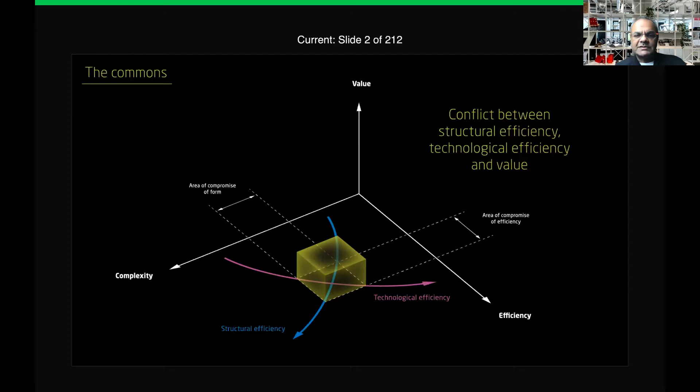And what we find is that we sit in that compromise zone trying to balance value, efficiency, and technology all the time. That's become suddenly in the last 6 months even more complicated as a common ground for someone like me. That same cube has turned into a much bigger cube as a consequence of the recent times when the world has shifted, where we can see value now more as a dance. You know, it's no longer a statue. The whole world is going to have to change very quickly.

We can see that the whole issue of complexity by the use of AI has gotten bigger, and then the planetary boundaries—this compromise zone that I call the commons, allowing engineers to operate across disciplines—has gotten really big for us. So I see it as an opportune moment.

The other thing I believe we'll get an opportunity now to revise in all these three areas is the common ground of homogenization. Over the last 25 years we've been doing these four things as engineers: being intelligent, being flying fish where we try to fly and swim at the same time architecturally and engineering-wise, sometimes modifying ourselves genetically using the tools, and often as engineers we have too many hands, none of them strong. I think all of this is going to collapse, and homogenization is going to disappear in the world of engineering in this common space, I hope.

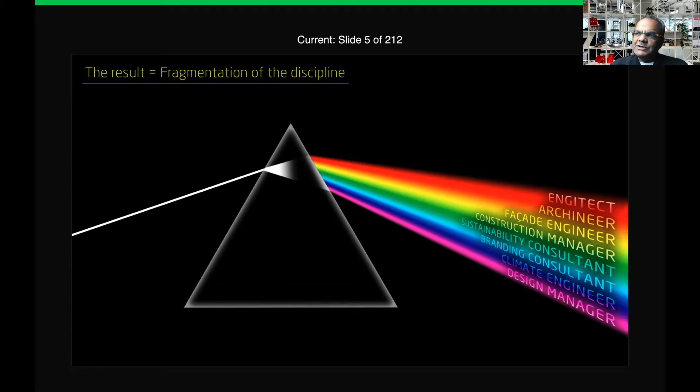One impact of that homogenization, which I've always said and repeat with this slide, is that it fragmented all of us between academy, practice, building, and our clients. So one hopes that, because of the shock of what's just happened, we will try to return to the left-hand side, all of us at the same time.

The practice still remains a combination of staunch for-profit engineering office, but also demands interdisciplinary action that we can take, in particular right now, in order to drag the profession into the discipline—which I think is not going to be easy, but it's the attempt we will make.

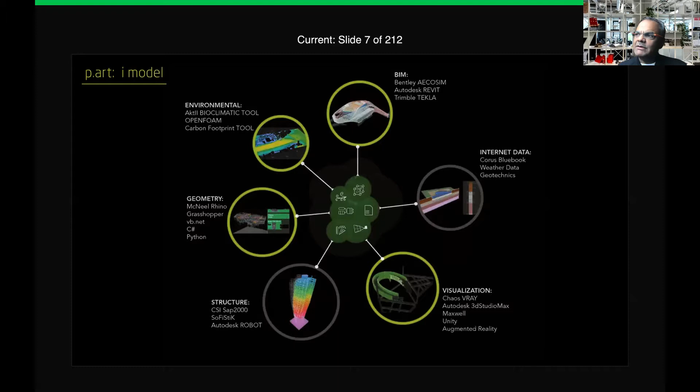That group does that by flattening the structure and the kind of things they get involved in. So our discipline as AKTII needs to do all of these things, and we try to invest in this part of the work. We're not just building and practicing—we're trying to do what I'd call research, in a very loose sense, academic research as well as practice research that then gets applied to our work.

In the meantime, the practice as a project developed its own ecology. We have to keep writing and thinking and saying things in order to move on, because if we don't do this stuff, we hang on to the profession for too long. So this is the kind of introduction.

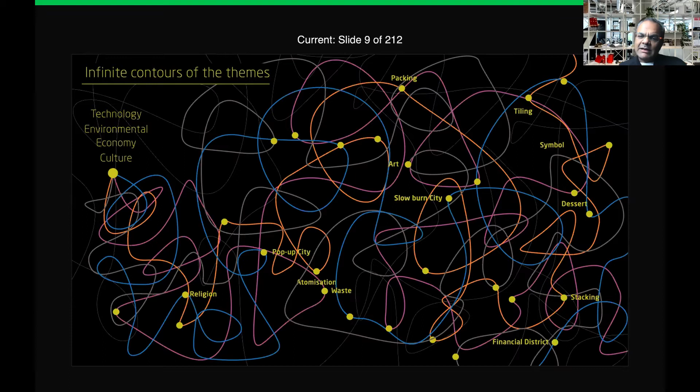For today, I broke it down into potentially three contours. I was struggling to decide what I could talk about, having a practice that's been so fortunate to have 300 or 400 people go through it. We've been fortunate that each generation has attached us to the disciplines of many contour points, and to try and talk about all of it is pretty difficult. It's refreshing to draw it and just dot it to see how many things we actually deal with. Today I thought I'd talk about three of them.

First is the technology and ecology and the social impact. The second would be something to do with intersections, direct intersections with academy. And the last would be the show and tell of a couple of projects.

If I go to the first one, I would say that we are being forced toward the social, ecological, and technological agenda of what we're doing as an engineer, or even in education. We're faced with the fascinating situation that indecent modernization in many ways is threatening ecology. And what we're finding is that sometimes there's too much eco-hipness, or sometimes too much technology.

I think we perhaps have to start to switch this a little bit, as of now, to understand the shift between nature and technique. Rather than abandoning or dominating with conservation, which is what governments are going to do next, we ought to get this balance between modernization and conservation right. Part of that absurdity of modernization that's kicking back on us is our own fault as disciplines, in that we've created absurd and interesting and difficult things just because we can.

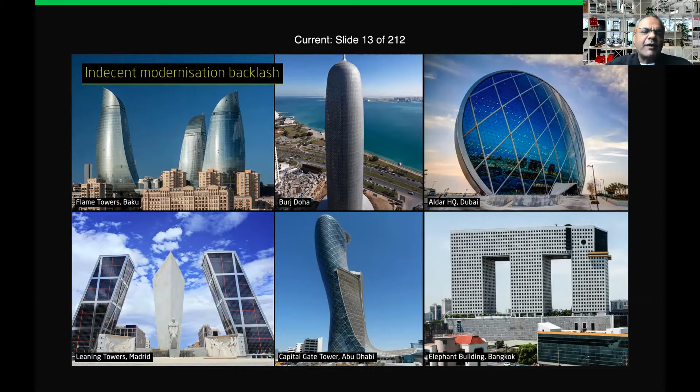So society is now beginning to kind of wind down modernity, as I would describe it. And we have to be cautious that it doesn't go too far the other way, where we stop building completely.

Part of that problem, in order to frame it for today's talk, would be to talk about cities. How do we define cities? It is so difficult, depending on who you read, who you believe, what book you understand, in terms of who is defining the city.

But probably the most difficult one of this is the one I can talk confidently about, which is the smart city, that I find abhorrent at times, because as soon as you attach the word smart to anything, it becomes dumb.

One of those things I've been finding is this separation between modernity and conservation, and how we deal with cities that have a lot of history versus new cities in the global south. It's really in conflict at some point, but the global south is going to exceed because it has so much to build.

I worry that we're being told that if we weave sensors into the urban fabric and then trawl the social network that has utterances, what we will get with these algorithms is really a city that's on autopilot. My own view is that if technology takes us that far, it is not going to be a smart city.

We have to save some of what we have done for the last 4,000 years. Of course, one of the important agendas is the sustainable goals that the UN have set up, and that is a good kind of calibrator in terms of bringing the two extremes of technology and conservation together.

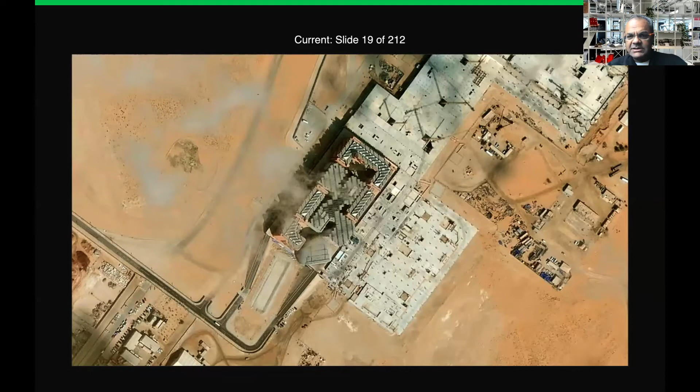That has happened through observing the existing cities of Yemen, which I showed on my first slide, learning from those, how they were built 4,000 years ago, and pushing them through with Foster and Partners, new technology and other consultants, trying to replicate some of the known things humanity has been working with for thousands of years, combined with real technology and then going on to construction.

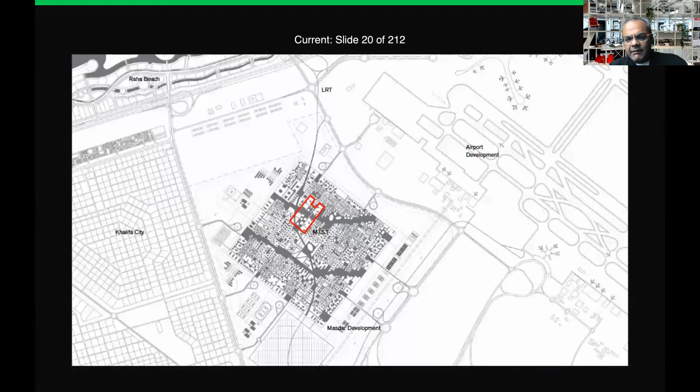We got to build one neighborhood effectively of the whole master plan, to the original idea of zero carbon. We put in the sun farm and the underground car that's electric, and built one component, which is the center of the city. It is the institute, the MIST, Science and Technology, where all the work is being done on how to develop new green technologies in the future for that region of the Middle East.

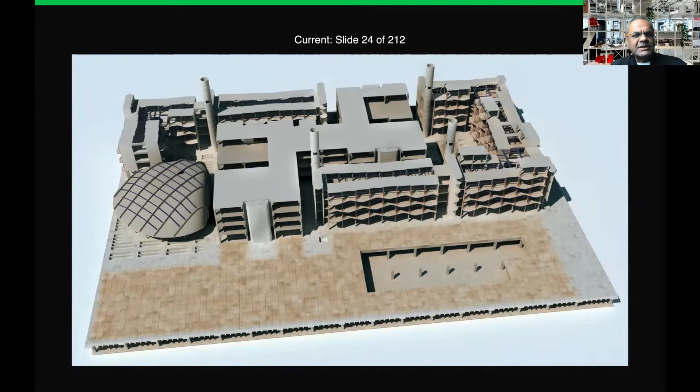And this is now fully active. I just wanted to show you that it didn't require a kind of dumbing down of the architecture by Foster and Partners. It is the best quality of construction you can get, and we use the latest tools, even the instruments or weapons of things like BIM, in order to deliver it.

But the most important message is the post-occupancy.

So after constructing it, what's important is going back to see whether the lessons from 4,000 years ago that were applied have made a difference.

This slide shows the equivalent in the same city, what is happening at our site, where we did enclosed spaces, passive ventilation, thermal mass using the materials we used, against the American dream in a way, the very big streets nearby and the very tall buildings. At the same time, on the same day, you can save 8 or 9 degrees centigrade in temperature. That amount of energy you can save without doing anything, just by putting the architecture of the past through the machine of the present, and rebuilding something modern that actually responds to the climate and the place. I wanted to drop that in as the first type of city I've been fortunate to be engaged with.

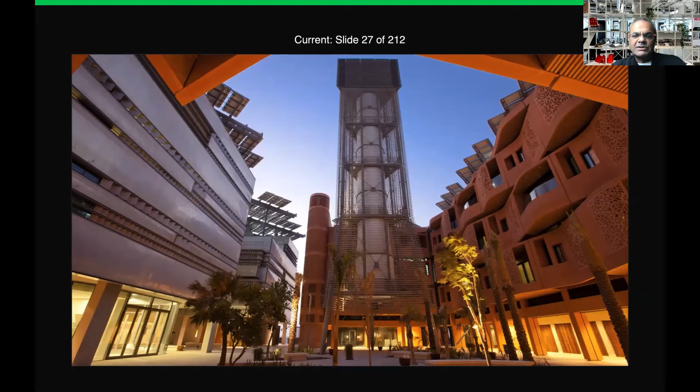There are all sorts of devices in here, and it's still a laboratory—literally measuring, with indicators that tell you when you're using too much energy. We have the old supreme features of building in the desert: courtyards, buildings close to each other, natural ventilation, and so on.

The second example in that socio-technological, ecological history is what I call the pop-up city. The Olympics probably provide another fast moment when you can look at what cities could do very quickly, as opposed to the ancient example I showed. In this one, we were fortunate to build many things, and we were at the right time in the right place to get appointed for many projects.

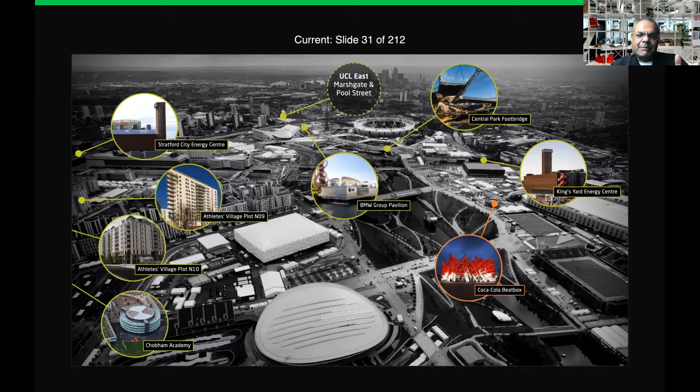That ranged from legacy projects like a school for the new community of Stratford to the power station. As engineers, we're not concerned about type, but about being able to work across cities in these different functions of buildings that make a city. I'm showing a school, now fully active with nearly 1,200 students, and the power station that powers post-Olympic. Both were built before the Olympics, and through the Olympics they take shape in a way.

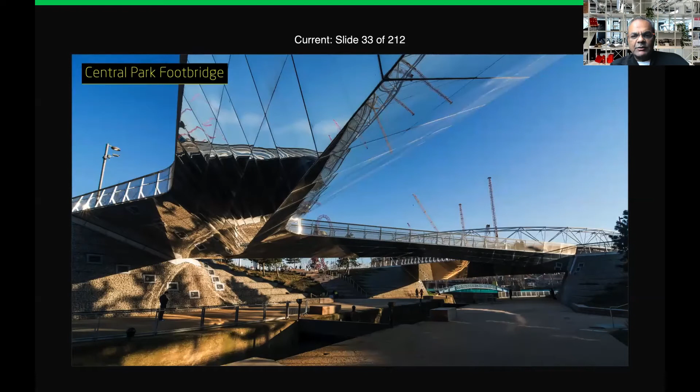I wanted to focus on one particular technological advancement on that project, the Central Park Footbridge. This was the main central bridge into the Olympics. There were 46 bridges, and only one was a design competition—so this is the message. It was an interdisciplinary invitation: architect and engineer had to take part as a pair. So that separation and fragmentation of the discipline I talked about was eroded by prescription. Sadly, the other 45 got built by engineers, but at least there was a movement that showed what happens when you put the disciplines together.

Heneghan Peng architects were the lead consultant on this, with us supporting them through the competition. The master plan in the air looks like this for the whole Olympics. Basically 60,000 people an hour were going to walk across this bridge for only 17 days, but then it was going to live 100 years after that.

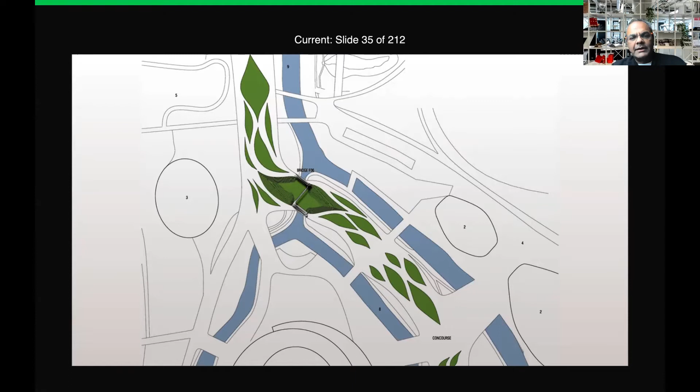Our design, the technology, and the formal idea were really to compete as architect and engineer at the highest level, to redefine what architects and engineers can do when working on a bridge. This is not to say big engineers can't do bridges, but if a bridge is seen as something more than a bridge, as Cedric Price said, then you need all the disciplines.

And that includes art. So we were kind of able to predict what others would do—either the engineer would dominate, or a particular architect. We came up with a solution that I feel responded much better, and it won and was built.

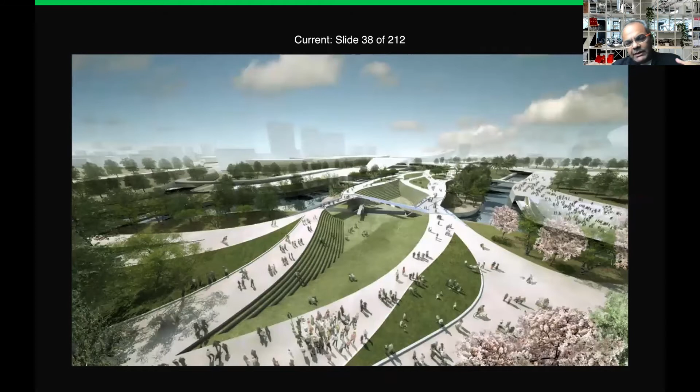During the Olympics, it was a land bridge with an excavation underneath, exposing an arena later when we remove the Olympic elements. Shih-Fu Peng and his partner came up with the idea to build it as an Olympic motif during the Games, using recycled trainers to create these two land bridges. The Z shape in the middle, the supreme feature left behind after the Olympics, would be a piece of jewelry but still function as a bridge. The idea was to build the land bridge with temporary materials from the rest of the Olympics.

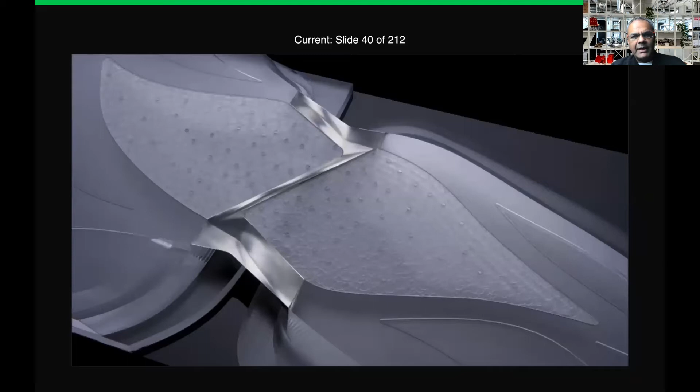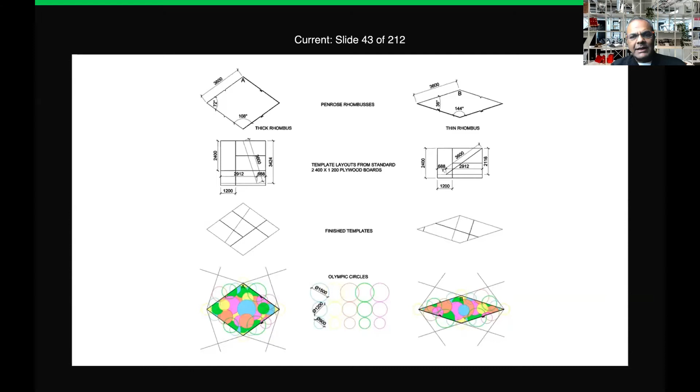That requires the kind of tools that people like Heneghan and Peng, and that generation of architects, use on a daily basis. I wanted to flick through quickly to say the structural complexity was really in trying to span the long span in the thinnest possible way, because boats still need to go underneath. So at the middle of the bridge, in the Z part, we had the shallowest bit.

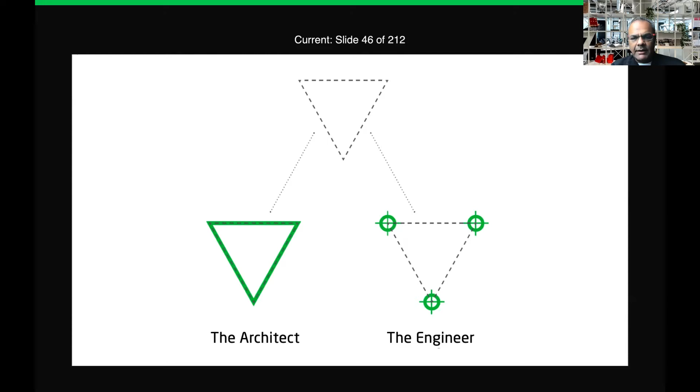The architect-engineer conversation that Corbusier started, the separation of the two, became quite important. The architect assumed it would look like what's on the left - this is his diagram. We had to remind him that to build it quickly, it would look more like the right - not a surface system, but a line structural system - because we needed to deal with dynamics in the middle of the bridge. I don't know if you can see the bridge moving, but the middle of the span moves quite a lot.

Here is the construction, and here are the 2 days in which it was assembled.

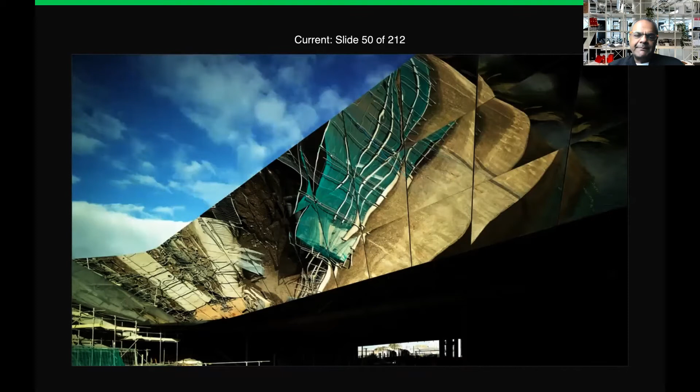So the discussion between architect and engineer became, and still is, a problem - even after we built it we keep arguing about whether it was a misunderstanding or a separation of disciplines, despite the fact that we worked together.

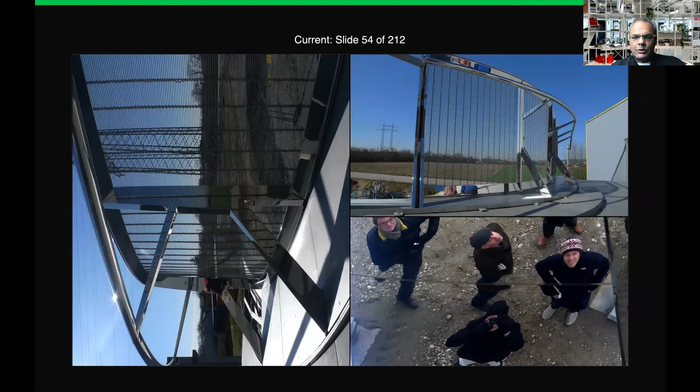What's nice is that it did get built, and it was popular during the Olympics. If you go there today, it's still a superbly popular place - one of the most popular spots, because it's become somewhere for people to visit. It's not destroyed, so there's pride in what was built there. This is during the Olympics, which is what I was trying to describe would happen.

The second ecological type, I guess, is the thing going on in the whole of Western Europe and will come to you one day - what people are describing as adaptive reuse, particularly of old infrastructures.

I wanted to show Birmingham New Street very quickly. This was, again, an international competition - a 1960s built railway station with a shopping mall on top. It looked like this because of where it was. Modernity meant the shopping mall over a station was dying - there was nobody in there, yet the railway had to be protected. The city of Birmingham needed to do something, because this is really the most important station after King's Cross and Euston in London, as it takes all the traffic to the north.

We were very fortunate to work with FOA on this, and we produced a very interesting design.

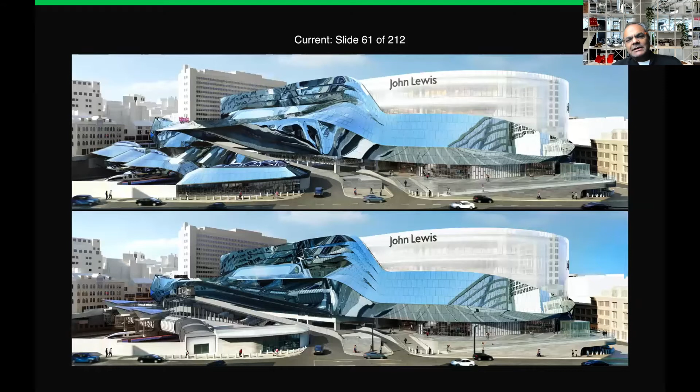The material was not sort of Gehry-like - it was beyond Bilbao. FOA proposed to save the station, keep it operational, but introduce a skin that would create new light, new reflection, new place, and new security in the city.

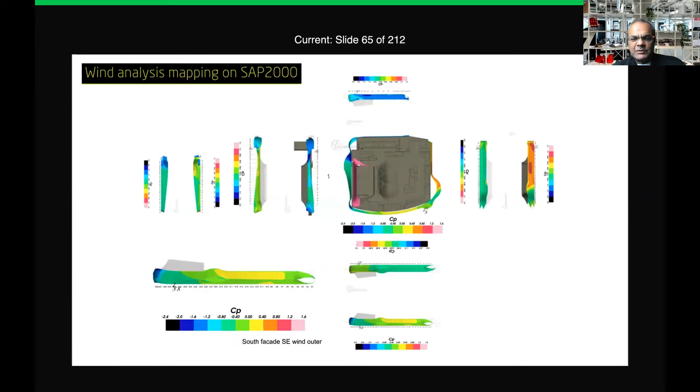What you see is this - the restrictions are enormous. The trains go here, with a train passing underneath every 4 minutes. We had to construct something that would allow us to map the sun computationally and understand how this skin would eventually reflect light, not into people's eyes but into the city, and also how it would demand a structural system that could be adapted to, and adapt, the old structure.

So the big moves we made were to cut a big hole in the middle of the station without killing people, introduce a new atrium, bring light into it, and put in this wonderful skin. So the city is alive.

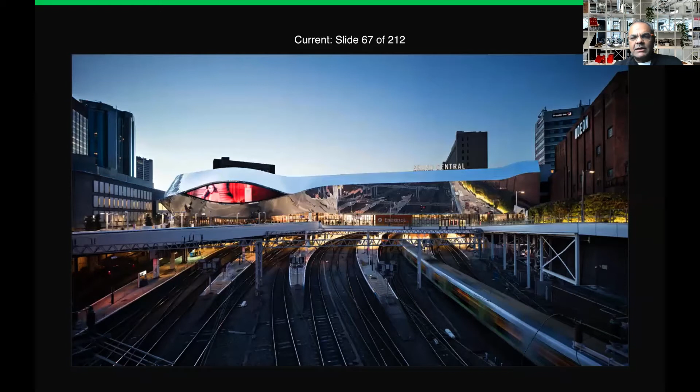When the trains go through, you still see reflections of the train itself going through, but you also see in the city a light, even during the sun setting and the sun rising. So it livens up the whole of the city. It's not a simple case of just adapting a structure, but taking the use of the structure, applying new tools to it to see what redundancy was in it, and then saying how far can we push that without taking it out and stopping the trains.

Inside, we put this huge roof with supporting ETFE. I think it has had something like 6 million visitors, which is 4 or 5 times the population of the city going through it. It's been very popular. The retail is now flying and it's really doing well, although COVID has had some impact.

In that kind of stream, buildings are also becoming very important, in that we're finding that particularly London, which has a lot of treasures - this is Saarinen's American embassy. So using the tools from Birmingham New Street, we're going back in looking at this with David Chipperfield. The fortunate thing for us is we're working with 2 great architects, Saarinen's original building and David Chipperfield, which was a competition, to look at how we can take this classic listed building and then do something to it. So we're going to convert it into a hotel stroke museum in the center in Grosvenor Square in London.

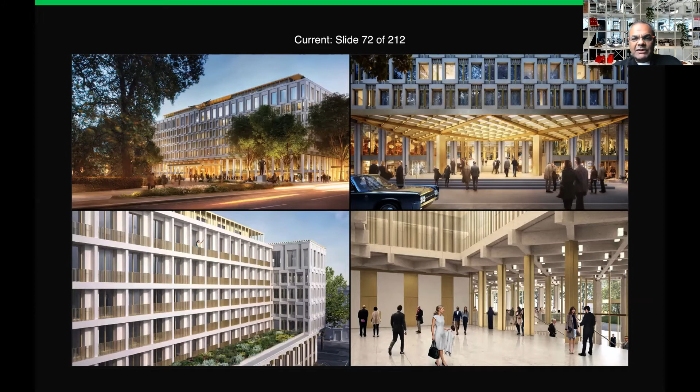It's on site right now by inserting several basements underneath it, but taking as little out of the original design and adding to the top of it again. So these tools and this approach of modernizing with care is actually allowing certainly the ancient or the medieval or even the kind of 20th century city buildings to have a new life. It doesn't mean all buildings need to be saved.

The other building I'll show you quickly, which is just finished, is Regent's Crescent in London, which is a John Nash 1800s classic. Again, we have just redone this. It was a grade 1 listed building, and it took convincing of the city and convincing of government and heritage people that we were capable of actually, as architects and engineers, taking some of the treasures of cities and applying a new contemporary twist to it.

Because the original facade, which had no joints in it, masonry facade, was not original. During the bomb damage, it had been repaired and replaced. So we were allowed to redo the whole facade using lime mortar and construct a completely new crescent in there. So historical buildings like that.

The last of those is really extending tall buildings. So we've done 12 stories on top of a 13-story building at the South Bank in London, where we're finding old codes, even from the 60s, that are allowing us opportunity with some cleverness to add and redo some of these towers already. We're doing 3 or 4 of these projects.

So I wanted to leave that first group at that level, just to tell you that in that group, technology, conservation, adaptation, and sustainability are coming together, and we're doing some interesting stuff.

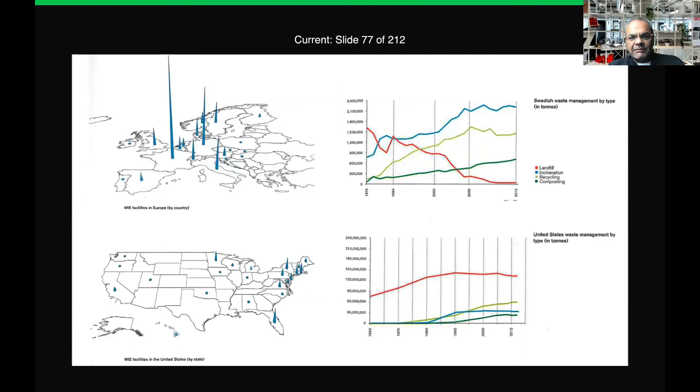But the alibi for this research really was to raise the profile of the architect in the world of engineering, because in infrastructure projects, we were generally finding that engineers just did it as a machine - there was little or no design. So this academic research at Harvard, which was 3 years of it, did quite a good piece of work saying, if you do choose not to landfill, one of your solutions is to build energy from waste power stations, which are not the greenest, but they are close to the greenest. And you can put them in the middle of your city, so you don't have to drive trucks everywhere and so on.

We were fortunate because I'd been successful with my practice, winning a competition in Copenhagen with Bjarke Ingels, whose group had also been exploring this idea. Copenhagen had done what I call the 80-20 rule on one of their power stations: they invited a team to work with 20% of the design of a new waste-to-energy power station, while 80% of these buildings is done by an engineer. They don't let the client or anybody near it—it's just a photocopy of the last waste-to-energy plant.

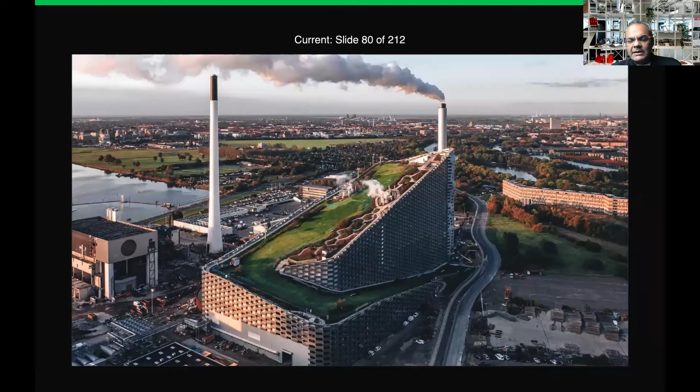So what does design do in that situation? How does it connect with academia? By bringing the conversation into academia and then rolling it back into practice, then pulling it back into discipline—here you see Bjarke's idea of making a place, thinking about health, wealth, and new ways of understanding these cathedrals, let's call it. We were successful. It's now history, it's on TV adverts, it's become an icon. House prices around a waste power station have gone up 10 to 20%, which is unheard of.

I wanted to show you one studio we did at Harvard. They set a script about building on a very complex mountain in Slovenia and ran a very quick studio—a design-build type studio, 14 weeks. One idea was to go into an extreme environment and hopefully build something, a shelter. The outcome was to select one piece of work and build it on top of a mountain, Skuta, near Lake Bled in Slovenia, as one of the students' projects.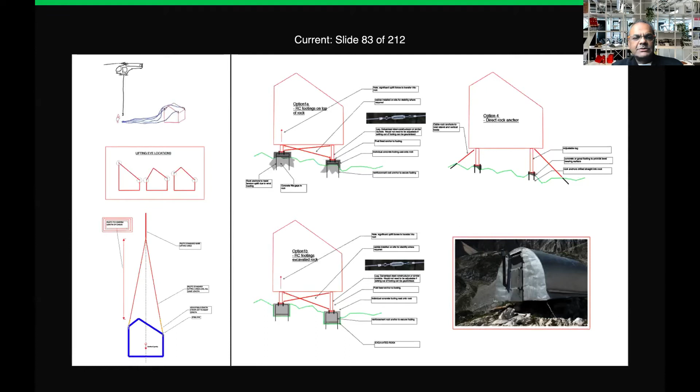One of the ambitions was to lift it in with drones to replace the donkey, using drones in a positive way. We didn't achieve that.

It's a pity you're not seeing it because it is a movie, but what happens is that kind of shelter has now become—on the left-hand side—also a similar experiment carried out to allow us to do an extreme environment as a courtyard in London, in our office.

With the same architect, in parallel, we were looking at tight space-making, spaces for isolation before COVID, for single people, and we made a little pod, shown on the left. Basically we're looking at miniaturizing and modularizing, building fast these shelter projects for extreme conditions. I'm sorry, the movies are playing on my other screen—I don't know how to shift it, but that's fine.

The third of these academic intersections is the universal building, which again connects back to ideas in London. We ran a studio with Harvard again, with Allford Hall Monaghan Morris as a practice—we always teach with architects.

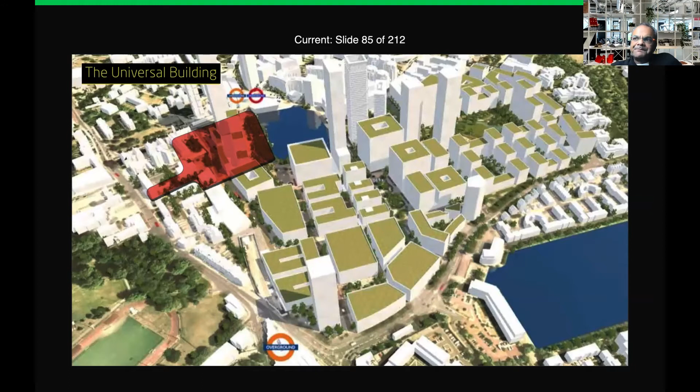We looked at the next district to be developed in London, called Canada Water, with British Land. What we managed to do there was bring the students in to talk about London, letting them live in the white collar factory, and have these four quadrants of people shaping London—from specialized people to those who integrate architecture, architects and non-architects. We gave a weekly seminar discussing the future of Canada Water and how we might make a new quarter in the city of London.

These seminars ran in parallel with geographers, sustainability experts, the LSE, asking what the future of a Western city might be. We then gave the students plots—just dividing a car park into 12 plots—and each worked on a plot without speaking to each other. The concept was that they would come up with a universal building to some extent, but on that site, without being allowed to talk to their neighbors at first.

Of course this goes back to the whole idea of the exquisite corpse and how cities organically grow, and London is a classic example from medieval times to now. What you see is that the next project, the next architect, the next style is not necessarily constrained by the last project, but it has to be informed by the history of what happened.

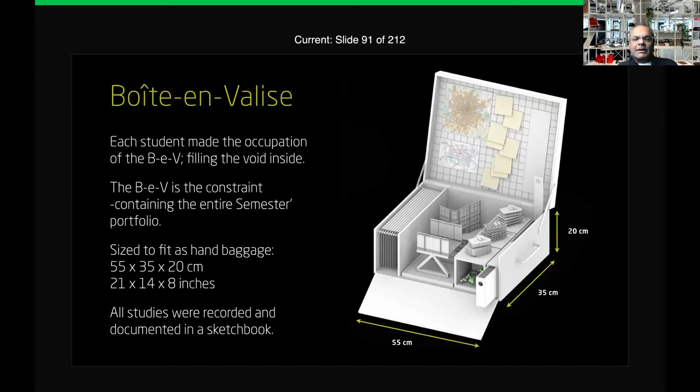And it's not a linear model. The other condition was that they had to make this on a weekly basis. They were making models weekly, no drawings to begin with, eventually packing it into this little pack and transporting it to Boston for the final review. You can't see the final product because my movie's not playing, but ultimately we managed to make 12 projects and take them back to Boston.

As a kind of question mark on whether universal exists, we can come back to that in the conversation. The current one on research and intersections is about material research.

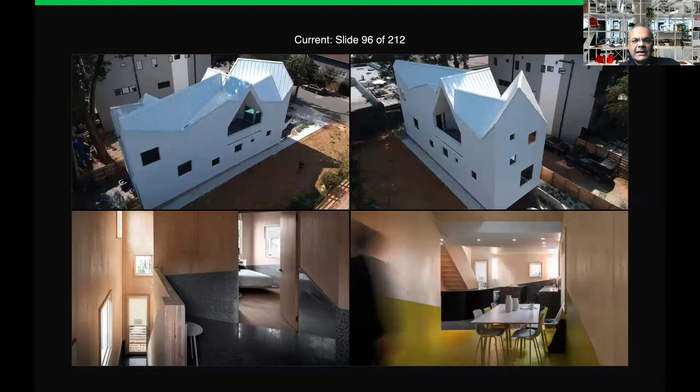With Jennifer Bonner, we got interested in taking a particular material, cross-laminated timber, which is big in Australia now, through work we've done on a couple of projects, including a house that won many awards with Friedrich Ludewig of Acme, and also some cross-laminated timber ground scrapers we did with Richard Rogers. More importantly, Jennifer and I had been talking for quite some time about her work, her idea of flat surfaces, and a particular house we built together called Haus Gables in CLT in Atlanta. That experience of building that house had been problematic because the atmosphere in the US was not accommodating of the ambition of this kind of material.

So we ran a studio this spring, just finished, looking at the impact of mass timber in Scandinavia and its effect, and then saying, okay, what if we take that as a studio — a collaboration between engineer, architect, technology and material, discipline and profession — while encouraging new young thinkers to rethink CLT as a surface material.

Part of that involved going to northern Sweden, to Martinsons, a small factory that makes cross-laminated timber, for a week just before lockdown. We were lucky enough to go see a 20-floor CLT building already being built there. So the students were immediately converted into a kind of CLT cult, in a way, to help produce the work of the studio.

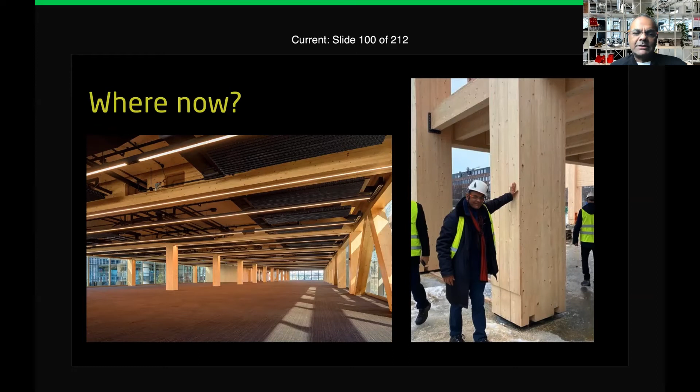We looked at two scales: a high rise, effectively one we'd seen at 72 meters, setting an ambition of about 120 meters as a maximum in CLT, and the house scale in one semester. The houses produced, for South Carolina as our site, were for 10 people.

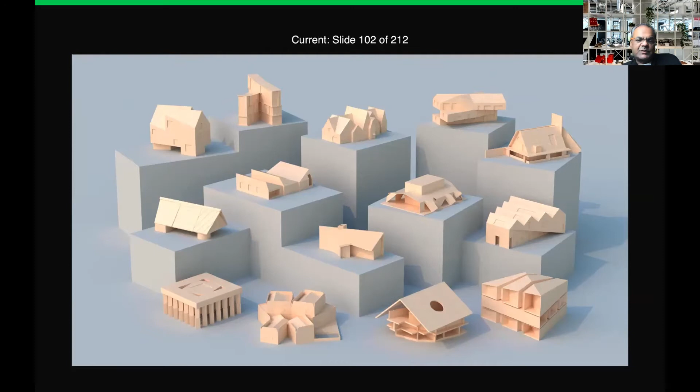We did not have COVID at the beginning of this semester. We finished the first project very quickly and then moved straight into online learning. So this was the last image — not physical models — of the houses that were produced. The rest of the semester was finished with the high rise in CLT over time, with this product eventually. Now, again, I can't show you the movies because my thing is flying — my movies aren't working for some reason.

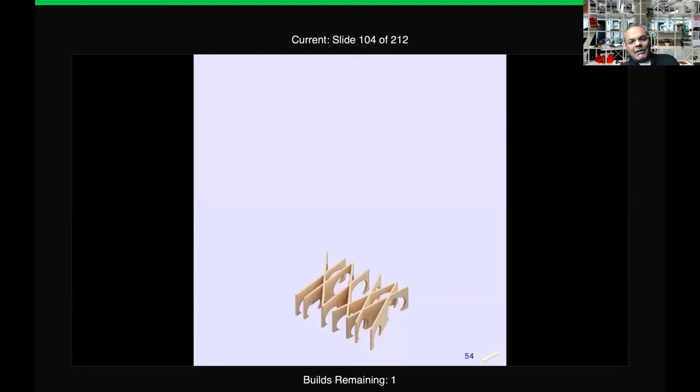What I can say is that the research done is on Instagram — check GSD Mass Timber and you'll see quite a lot of these projects. As we suspected, the students came up with new questions about CLT at both scales, to the point where it draws in the architect and the engineer much earlier. So rather than imagining this material only as an industrial product in the realm of industry, industrialists and investors, how can designers bring it back? Ecologically, this material is not going away.

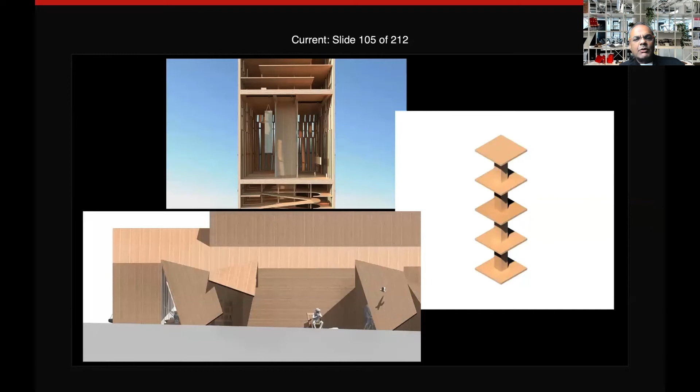So we go on to the last section, which is engineering types. I wanted to just drop this in because this is the show and tell bit. I'm going to finish with this group of projects.

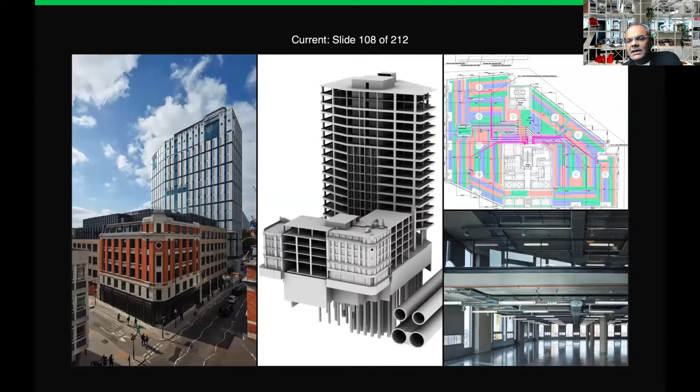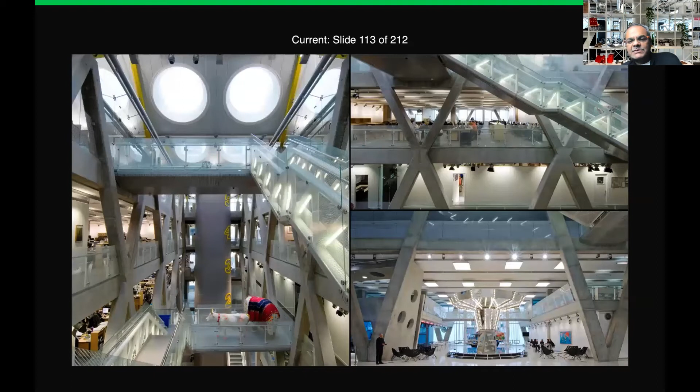The first is really office type, which even since these slides were made has changed. This is the White Collar Factory that we've been working on — office design and the future of workspace for many years, particularly with AHMM architects. We live in one of our own buildings, the White Collar Factory, which until recently was kind of the poster child for how to work in a creative space, how to create a creative space with natural and passive ventilation, exposed concrete — the warehouse concept, partly born from another project we'd done previously with the same office. So icon, modernity — the whole idea of concrete and how you can expose it materially was brought into how we can imagine these spaces to be museums, workspaces, living spaces, and factories all in the same building.

Unfortunately for us, we've been grabbed by that industry. So we've been lucky enough to work for the best clients building in London. This is Bloomberg's headquarters with Foster and Partners, which is now finished - a classic workspace by a patron who wanted to leave a legacy, and an architect who also wants to do the best building he possibly can.

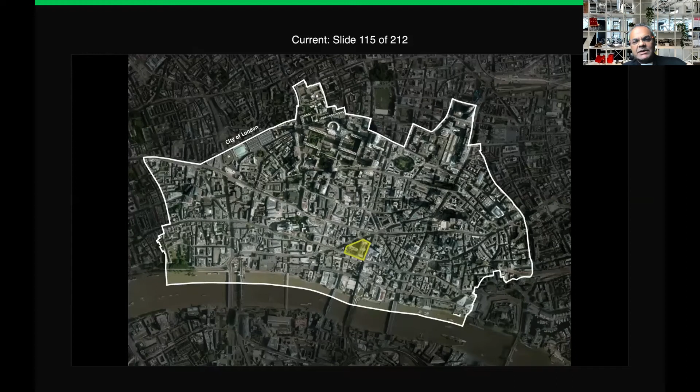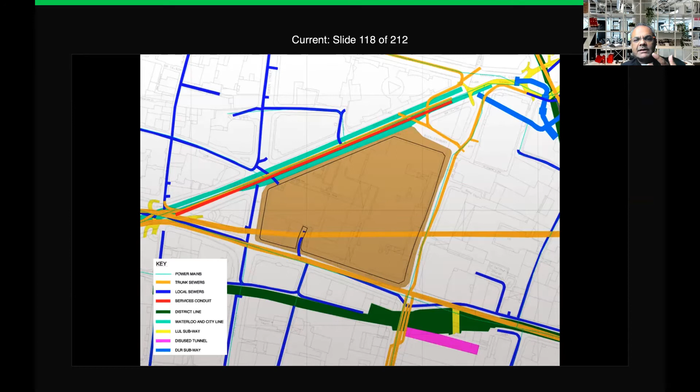But the site is probably as difficult as it gets. It's right in the middle of the square mile, so effectively St. Paul's acts as the conservation icon in terms of height, but also there's the infrastructure underneath the site. Because it's a Victorian site, we have all the sewers and railways running underneath this area. The problems we created as engineers were putting the city at risk, since high quality land could not be developed unless we went for some interesting tools in how workspace could be made. To make something like this, you need complete investment by the client and the architect and everybody, including the structural engineer.

The way Bloomberg's work is: people come into the reception at ground level, go to the top first, where they have a pantry where they manage to converse and mix and talk before they go down to their workstations. So the common ground is at the roof level, where there is serendipity, conversation, deal making, and some fun and healthy foods.

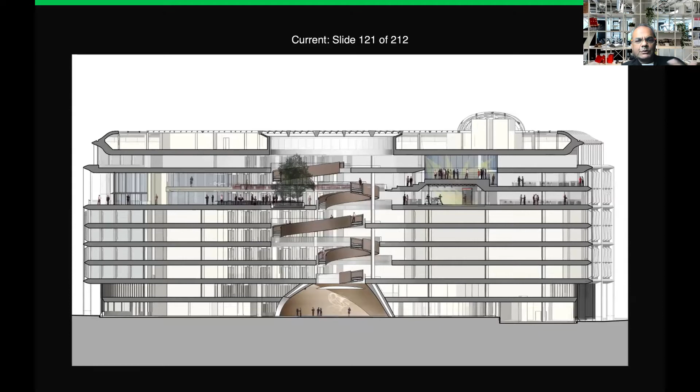A lot of instruments were used to model this - for example, the forensic modeling by Foster, taking the work all the way back, in terms of air quality. We wanted to make something that will take the air in, but it can't right now because the air quality isn't good enough. So how could we design a facade that can be open in the future? For this, the architects, the M&E engineer, and the structural engineer need to work together in order to design very finely how this will work.

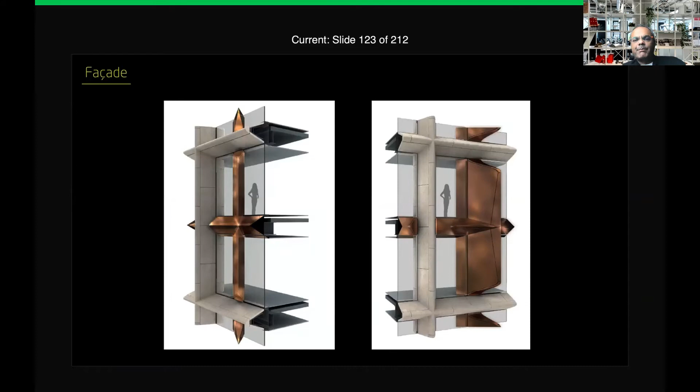And the facade is probably the most interesting architectural part. I have to say, when you go to the building, you will see that it will be there for 100 years - that was one of the ambitions, made beautifully. But formally, it is to break the space so that what is 3 or 4 floors looks like 1 floor from the outside, so the large building doesn't feel out of place in that location - which is the architect's strength.

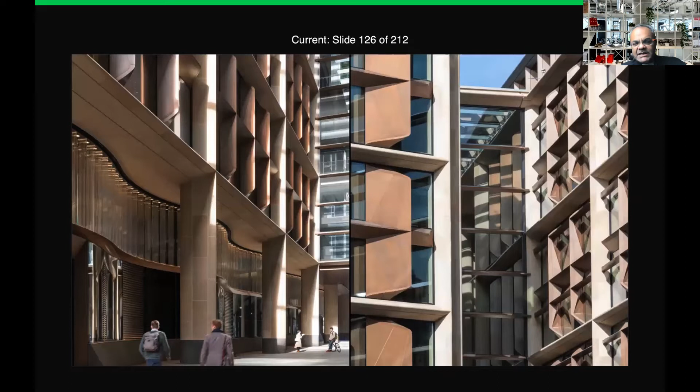We've also reconnected all of the medieval streets on this site, and we've put a public space at the ground level with normal restaurants and so on. The breathable facade is highly tuned - it's bespoke, made with fins that can open automatically to let in the air. Lots of testing done, lots of prototyping.

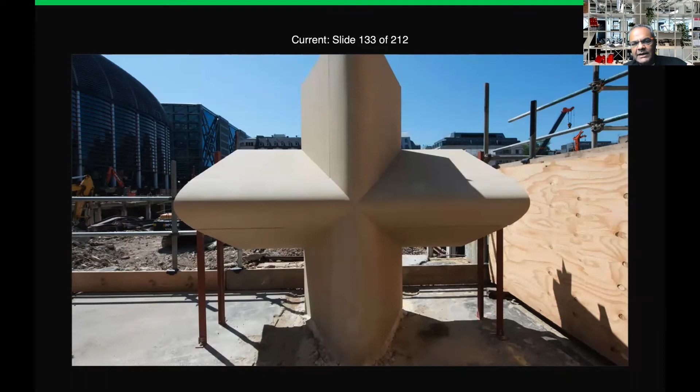So this is the level of detail I wanted to show, because I don't want to leave you with the impression that you just come up with concepts, draw them, and then it happens. I think it's important to say that if we are going to find profit in the difficult times we're going to come across, the disciplines - instead of that fragmented issue between construction or architect and engineer, academy and practice - need to come together. We've also got to be able to see things from the other person's view. Here, how we would make something as fine as this had to be tested physically.

But probably the most difficult part of the project is we found Roman London underneath our site, not knowingly - we didn't know it was there because it had been buried. We had some suspicion, and that was major, basically a Pompeii-like story of London reincarnated. The architects and the clients were very pleased to donate a lot of these artifacts to the museum, but also recreate a small part of it inside our building so visitors can go and see what was the Roman site. But this is what I wanted to show you as an engineer, because the gray is what is already there - this site had been developed since 1964.

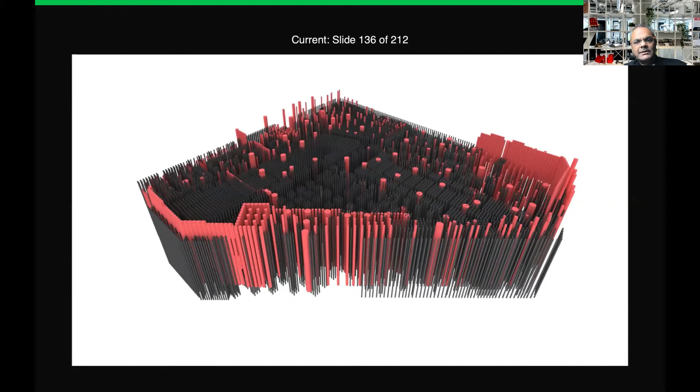So the archaeology of the engineer was harder than the archaeology of the Romans, in the sense that we could only put in a certain form, a certain type of building on this site, with some very clever soil structure interaction modeling of how you could reinforce the ground to take the weight of this building that sits on top.

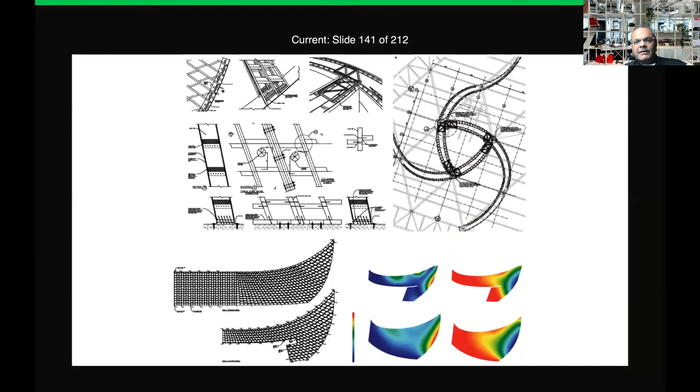Inside, there were a couple of special features. One is the reception area, a beautiful piece of timber with a kind of volute geometry that sucks you up into the space. You walk up this ramp or down it, or take a lift to the pantry. This allows a nice way to circulate to your desk after the pantry, but also to meet and bump into people, and at the top to enjoy what's perceived as the most beautiful view of London's architecture, St. Paul's. I just wanted to fly through this and show it to you.

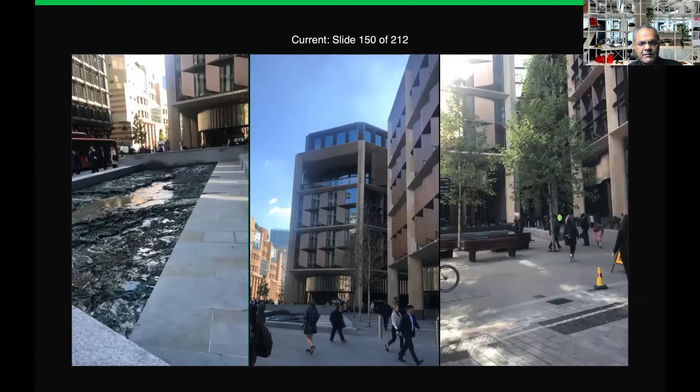We did other things. On the left, we exposed underground rivers that have been buried, as art. In the middle is an art exhibition that now takes place, changed every quarter, so different artists occupy the space. This, for example, is raising awareness of melting ice, done last summer as an art piece just to draw attention to the ecology.

I was fortunate enough, when we were pitching for Google's projects, to read Eric Schmidt, former CEO of Google, write a book about what makes Google. The core of that book is basically you have to be people-centric. So a lot of these important clients have already been baking in the importance of the body and the human in terms of how you build a future workspace, what will be the future of life.

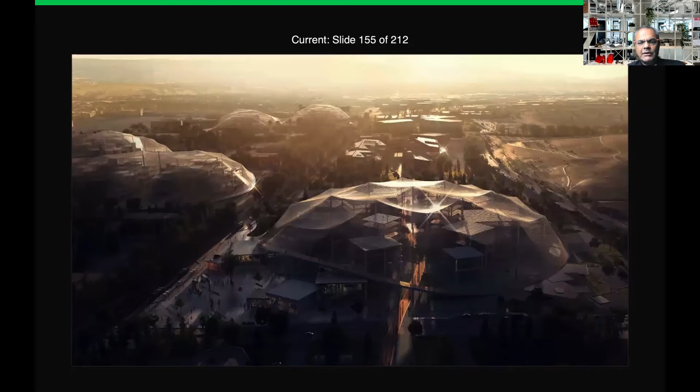This is Bjarke Ingels and Thomas Heatherwick, Google Mountain View, where the idea was to create a global or large scale environment with the dome, down to a human scale where people work, connected to nature, with four kind of streams of work: designing it using digital-analog techniques, the fabrication, automating some of the construction so we can reassemble this building quickly, and then what we cover it with to maintain the atmosphere so it feels like being outside in California, yet it's a filter.

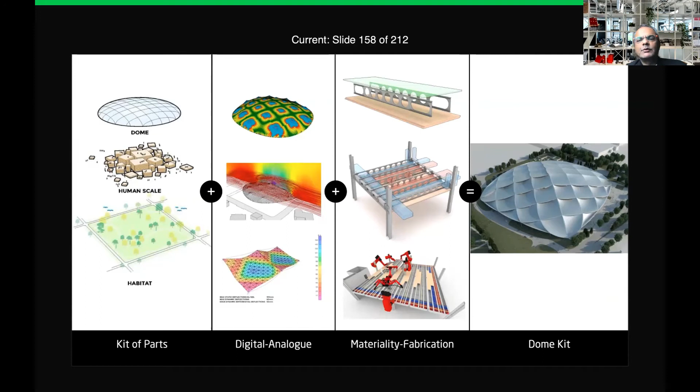There's a lot of form-finding work done, a lot of tools, including modeling ponding on the roof. I want to give a nod to our computation group here, because a lot of this work is impossible without what I mentioned earlier, the non-professional structural engineers in the office, who I'd call broader designers, raising these questions and being able to computationally solve some of them, even achieving low tech that looks like high tech, like how you reassemble something like this.

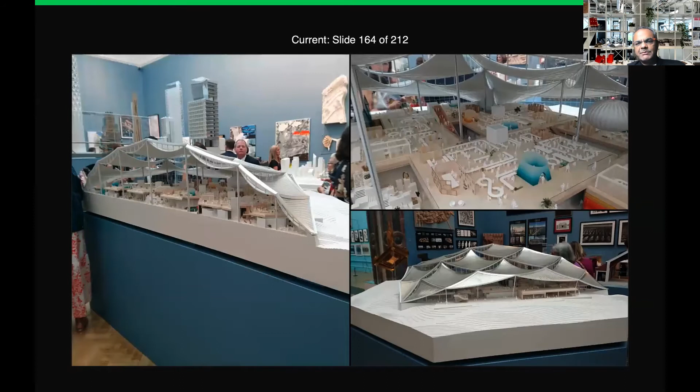So that building is on site. If you go on YouTube, you will see this video, it's almost finished, this was actually a bit from that video. We'll be opening it sometime next year, almost as it was conceived by Bjarke Ingels and Thomas Heatherwick.

The last of these is Slow Burn City. In a way, King's Cross is that. After the Olympics, you have the buildings I described, and then you have districts, where King's Cross is the latest district. AKT are lucky that we worked on 12 of these buildings.

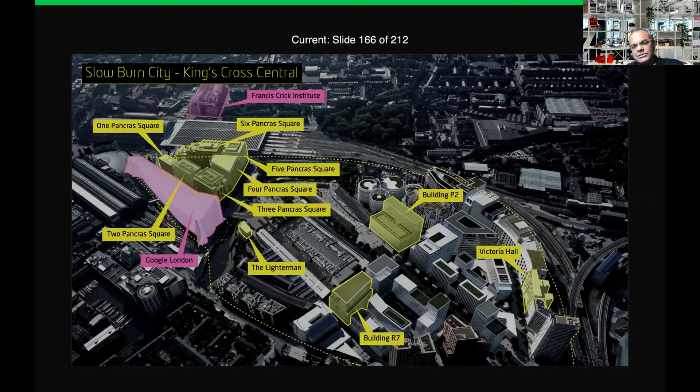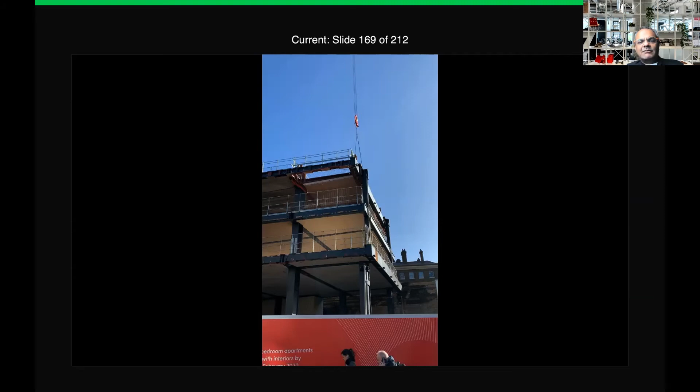You can't see the video, unfortunately, but I can tell you that this is a video taken about six weeks ago of the CLT floor that we're building. I have two more, maybe two and a half projects to show you.

I had to show you a tower, and without the movies it won't be as effective, but we've been fortunate again to work in Canary Wharf, where there are lots of towers. It's our tower district, but this time it was to build a new icon, a residential tower with Herzog de Meuron and Canary Wharf Group.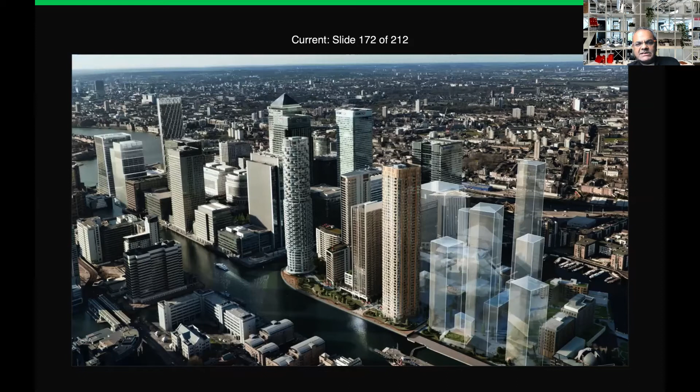The characterization and identity of a cylinder was something alien to this district. The reinvention of a type—what is the residential type for vertical living in the context of London, which affects many of your cities—was really the mark of success and supreme architecture, in my opinion, because it may look like the car parks in Chicago as a cylinder.

There are many cylinder types, but it is highly complex in terms of the different typologies that occupy the height of this building. So there is a transformation taking place, which is also structural, as you go up: building lofts, clusters, amenities, bay windows, different types up the building, made possible with the tools.

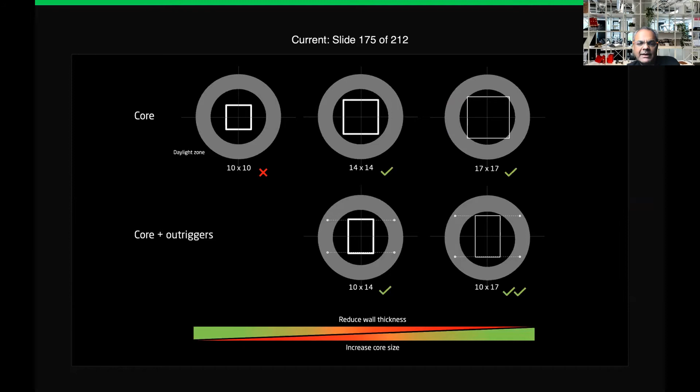With some of our tools we're able to combine stability systems between cores and outriggers—many of you will understand that—and use, rather than only one type, change the typology and merge it up and down a building in order to deliver some of the things these architects are doing.

This is a typical plan, but I can assure you the columns in the core stay constant, while the columns move up and along the plan to accommodate different types, and also the spiraling of the flats. So the windows are never at the same place, in order to allow a kind of privacy, to an extent.

Again, looking at the urban scale, the impact of bioclimatic events that will take place, and also wind after we've built and during our construction, was all modeled—things we're able to do these days.

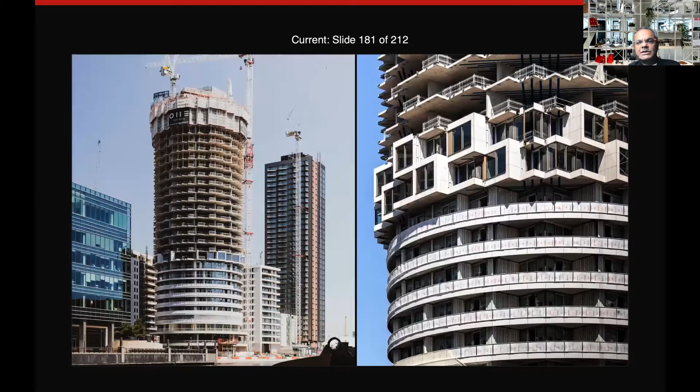Again, it's constructed and looks pretty amazing, I think, nearly finished. There you get a feel for the outcome: everyone has a unique view, everyone is private, yet the structural system, through those overlaps between types of structure, delivers a new cylinder driven by a new way of living vertically.

And the icon is such that you see it from the district itself. It offers a new identity to what is the only residential block, let's say, in a largely office environment. So immediately it's announcing itself beautifully, and then landing into it.

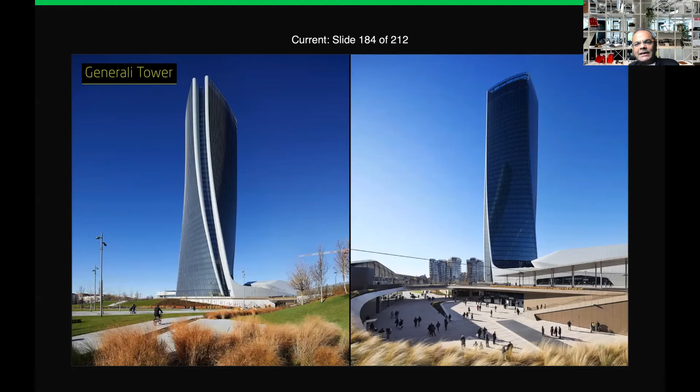I want to show you, I have to show you, at least one Zaha Hadid building. Sadly my movies don't allow it, but this is Generali in Milan—I really wanted to show you where we are. We did several changes to this type, as I showed you. The Herzog de Meuron building moved structurally slightly different from what everyone's used to—extrusions. But Zaha's office has also been doing several of these.

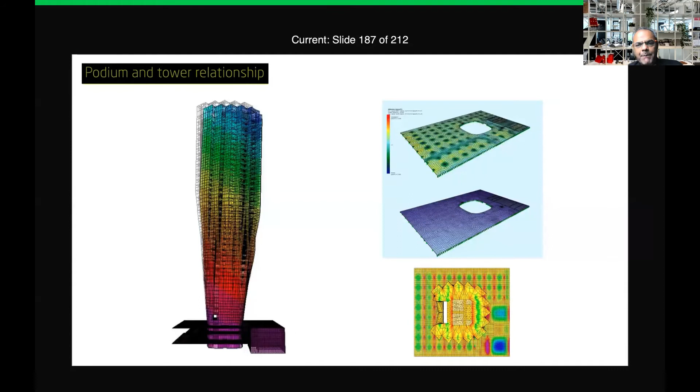The case in point here is taking Iraq and the central bank there, starting with the core as a building—a box that is secure and made of concrete—then splitting it up as you go up the building and rotating the columns to make something that faces the wind. So basically we're splitting the core and dividing it up to rotate it so you get lighter views. It becomes lighter and lighter as you go up the building.

So as a formal architect-engineer move, this is not extrusion. It is parametric to an extent, using the latest tools and material techniques in order to deliver a new high-rise, which is currently on site.

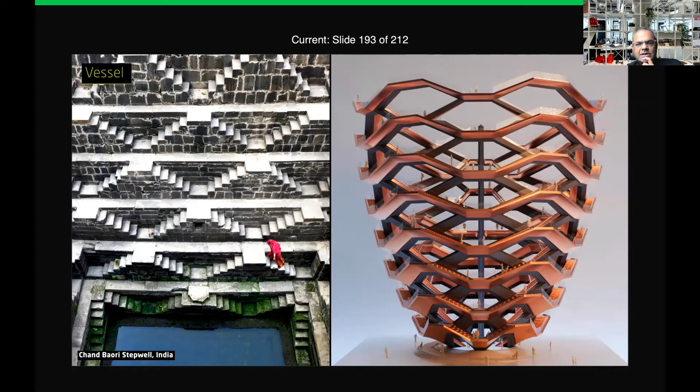I don't want to talk a lot about this, because if you want to see it, Ed Tibuzzi gave a fantastic lecture at Fabricate last week in detail. But I wanted to mention it because without doing the kind of towers I showed you, I don't think we would have been able to do the vessel—because the vessel is about not only stacking a simple brick into a complex form, but about taking the technology of human comfort: what is it that scares people when a building moves, and applying that to a public space.

All of the work on this building really was an inverted form where vibration is the key. When you get one person on here at the top, or 10 people, or when it's really full with 240 people or 1,800 people a day, how much does it move? That wouldn't be possible without having done some of the vibration calculations on the towers that I showed you earlier.

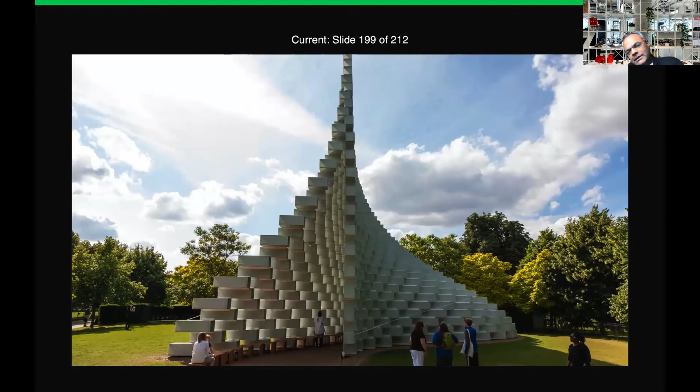This is a movie on YouTube, so you can find it. I'm finishing now. I wanted to show the second last project, the Serpentine Pavilion, and say that technology, ecology, academia, all of these things sometimes come together by luck. Being asked to do something in London for Serpentine and being challenged to do something different from what had been done very well 12 times, partly involved working with Bjarke Ingels in New York, his Copenhagen office, competing for this project, and then building the Serpentine Pavilion in probably one of the most complex ways you can imagine.

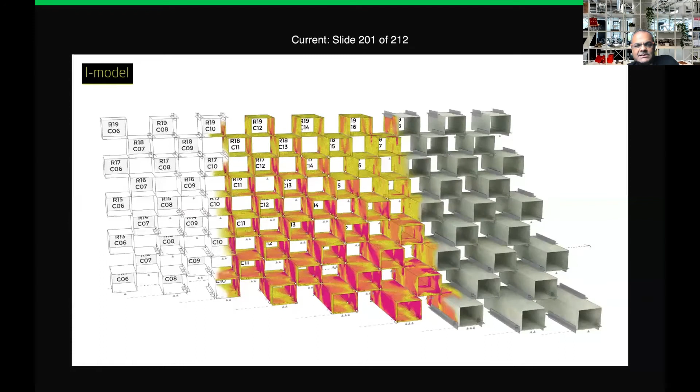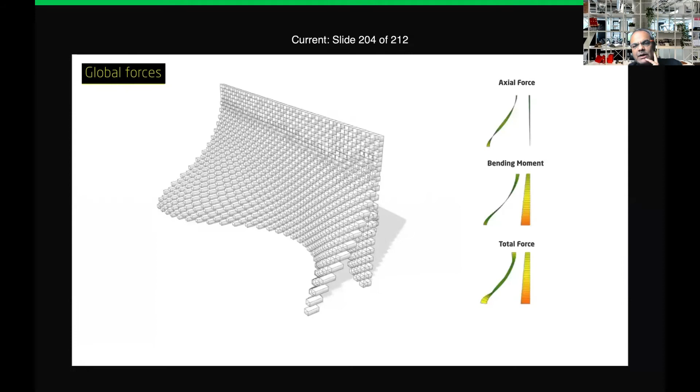That can only happen through all of the things I've been talking about, through splitting the processes and automating with an amount of artificial intelligence, an amount of scripting, so that we can do it at pace, across countries, across timelines, and also rethinking Platonic forms, where we divide things into beams, columns, and so on. What happens when there's a complex form like this, where it's difficult to define anything as a wall or a column or a slab? Quite a lot of that can only be done through the work that I've shown you. I'm just flying through it.

This was the ambition achieved, finished, made out of reinforced plastic boxes, the size of a coffin. And this was transportable. So the ecological story is it was in Vancouver last year, for those of you who are interested, and it will keep moving as a pavilion. So it is recycled in that sense.

The most advanced plastics to make an English brick, a new version, but I'm not sure our community will accept it.

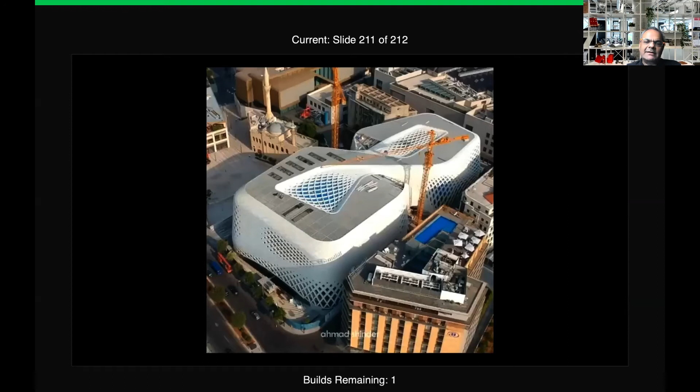I want to finish with Lebanon, because I was very sad and tragically hurt by the fact that this building, which is the souk, burned down last week, partly. I wanted to really say that all of these things don't have to be in the West. This is an adapted building, a 3-story car park underneath us. With Zaha Hadid, we built a new shopping center.

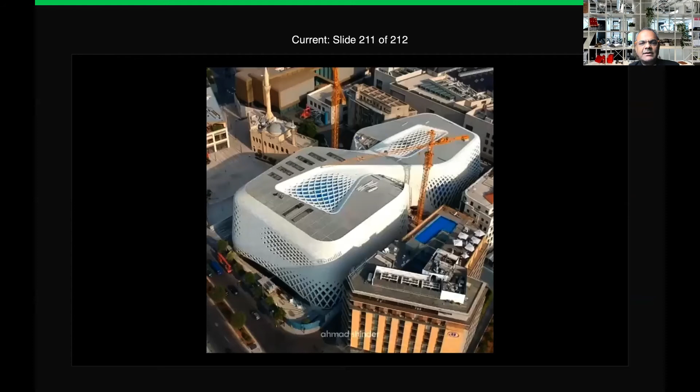This video, which you can find, is by Ahmad Shinder, who lent me the video. You see it just before it was on fire last week. It went viral last week when it caught fire.

So I'm at the end. All I want to say is, all I've been trying to do is connect science and architecture through this conversation, and build a common bridge across us so we can have a conversation about it. I apologize if the buildings were too familiar, but I can tell you the script was specifically designed to work with you. That's it.

Thank you. Thank you very much, Hanif. It was a great presentation.